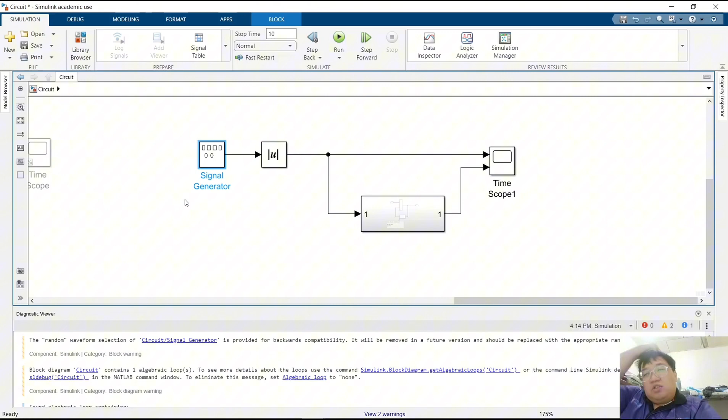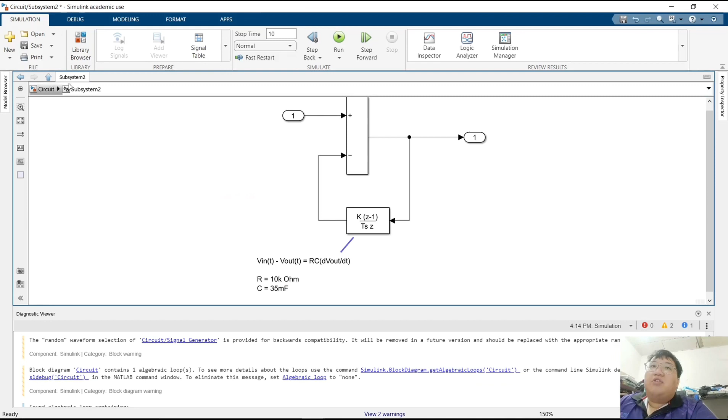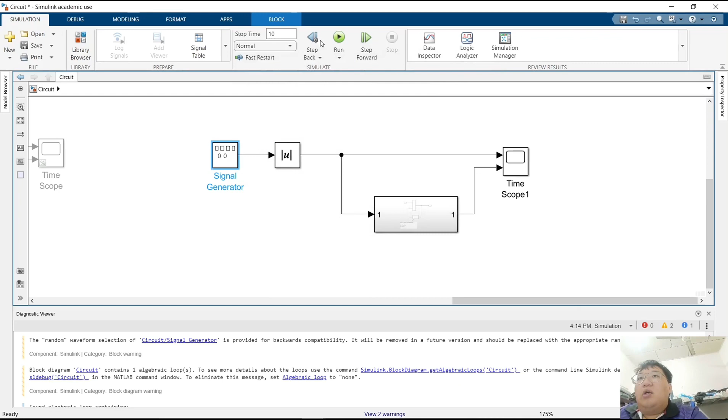Okay, so in addition, before we start the simulation with the values from the workspace, let's start with the generator first to test the RC filter system. So we set the signal generator amplitude and frequency randomly. For the frequency we can set 900k, because our group is using 900k. Now let's try to run it. The left one is before the filter, the right one is the waveform filtered with the RC circuit.

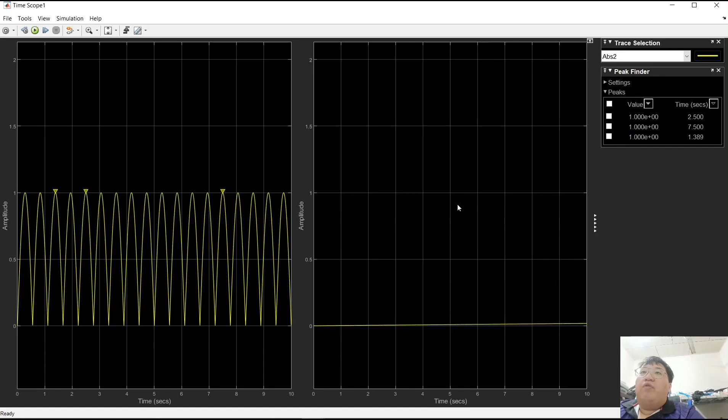Hi guys, I'm Valentine Teo Jin Lung, my matric number is C210010 and I'm from group 9. Today I'll present the simulation of x(t) to Simulink, and then X(omega) to Simulink. So let's start with x(t) first.

As you can see, this is our coding. Our group 9 is using a fundamental frequency of 150k, and the cutoff frequency is around 900 kilohertz. So let's try to run this coding first. Let's wait for a while. You can see that this is the waveform before the filter and this is after the filter.

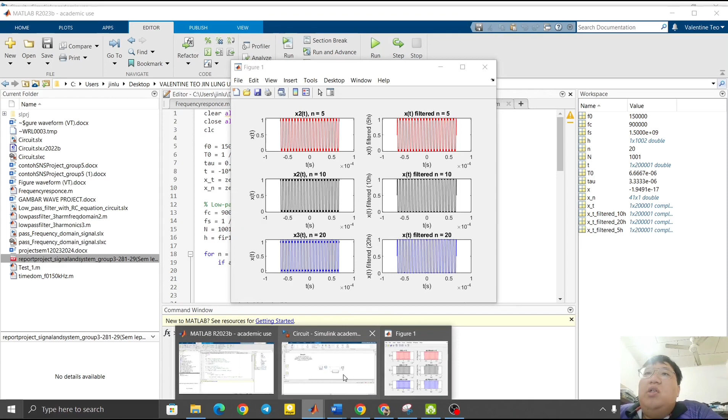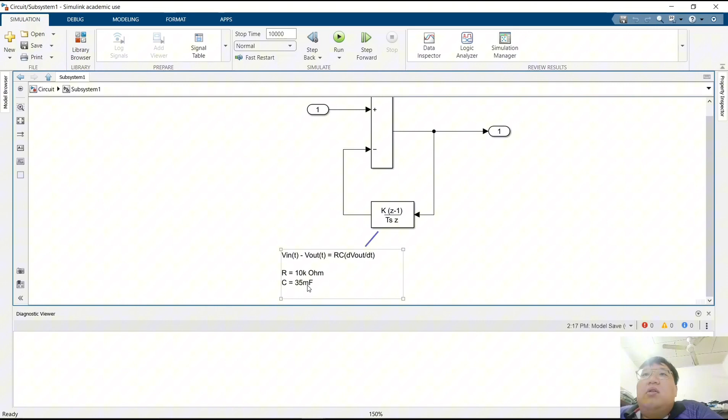Now once we got the values in the workspace, we'll move to Simulink. Before we run it, I would like to show you that this is our RC circuit that filters the signal. The R value is set at 10k ohm and the capacitor value is set at 35 millifarad. Okay, let's move back to it.

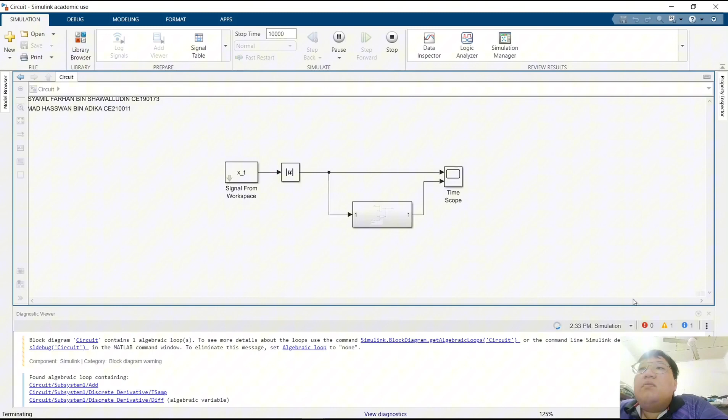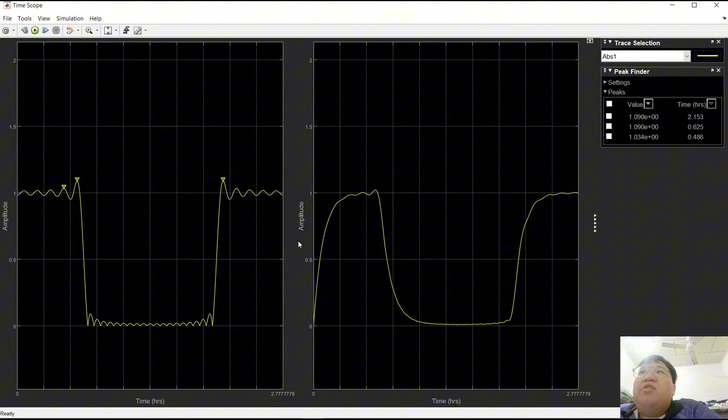So we set the stop time at 10,000. Now let's try to run it. It takes a while, still loading. Okay, so this is our waveform. This is before the filter and this is after the filter. Now we'll move to the next part.

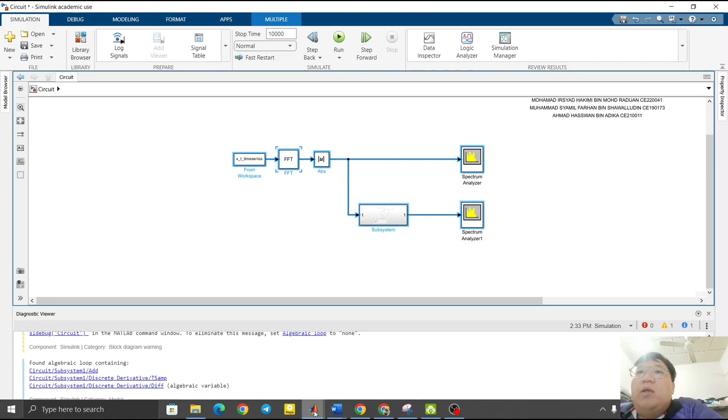Let's comment out this circuit first, because I have another circuit here, which is X omega. Comment. Now let's move back to MATLAB. So this is our circuit for the X omega. The fundamental frequency still remains the same, and then let's try to run the section.

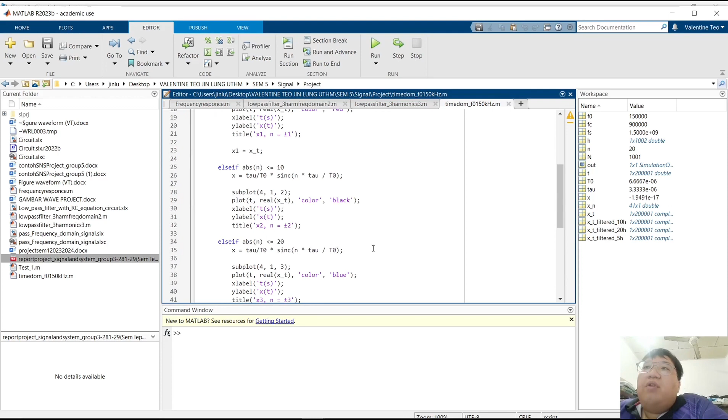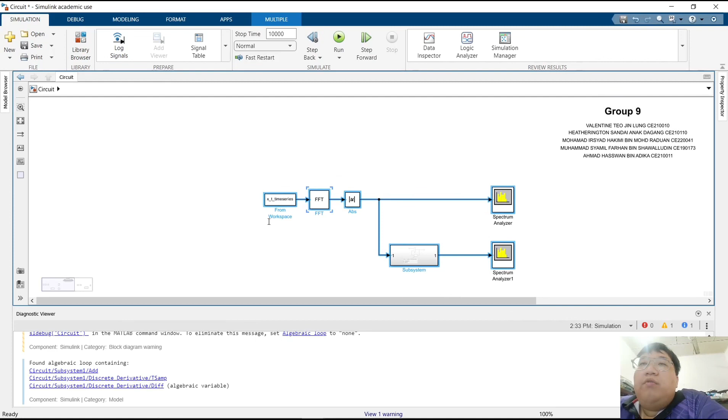It takes a while to run. After it's done, the workspace has been refreshed, and this is the figure of the x(t). So now let's move back to Simulink. It will retake the values from MATLAB. Now let's try to run it.

Okay, you can see that. So this is the waveform without the RC filter, and this is the waveform with RC filter.

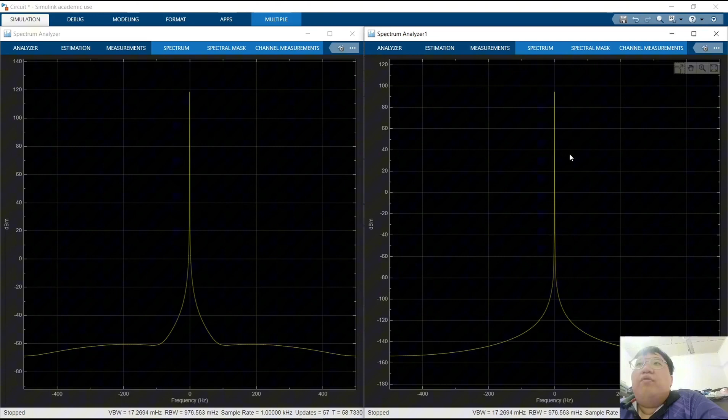So next, I'm going to explain the coding for our subject. This is our coding for the low pass filter. In this project we're going to design about three harmonics and get the output result. For the coding, the value given to us is 150 kilohertz for F0, and for the FC we were given 900 kilohertz. So this is the coding for the low pass filter three harmonics.

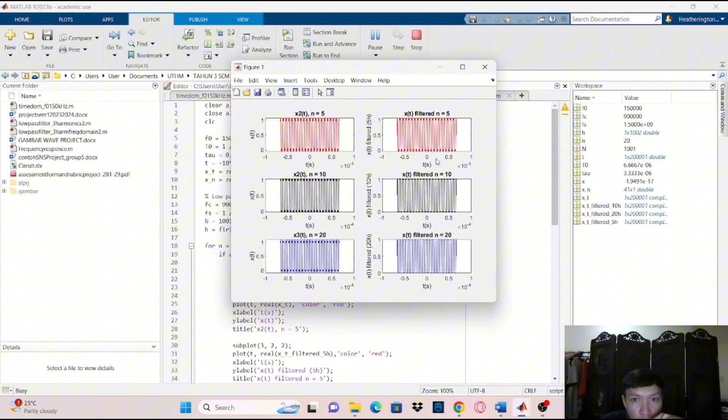As you can see, this is the filter signal with 5 harmonics. The second one is the filter signal with 10 harmonics. The last one is for 20 harmonics. So I'm going to run it. Yeah. So this is the frequency that we get for the x(t). As you can see, this is without the filter, and the other one is with filter. This is our x(t).

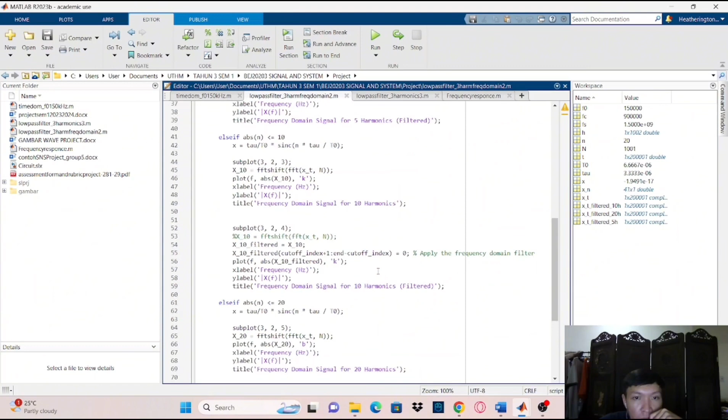Next, the coding for the frequency domain. For the frequency domain, we use the same values, 150 kilohertz and 900 kilohertz, with the third harmonic coding. So I'm going to run it. So this is the result that I get. For the frequency domain, this is the wave that we get, and the other one is for the filtered one. This is the result that we get.

And then for the tau part, we were assigned to use 10, 20, 30, 70 and 80 percent values. So this one we're going to get 10% tau. As you can see, this is the result that we get. And then for the next one, I'm going to change it to 20%. So I'm going to run it. So this is the result that I get, as you can see here.

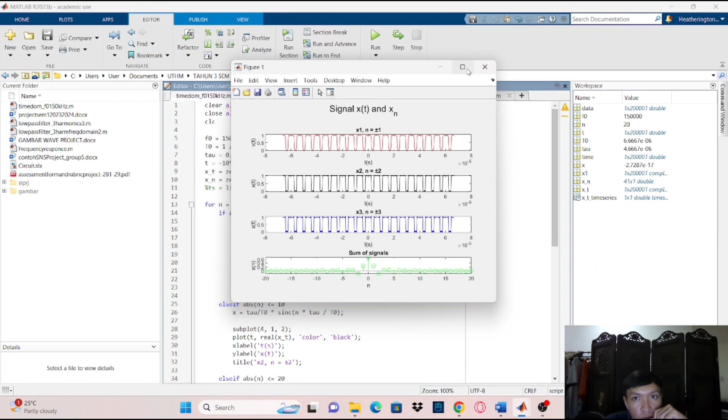And then the next one is 30%. So this is the sum of signal that we get for the 30% tau. And then the next one is 70%. So this is the result that we get for the 70% tau. And then the last one is 80%. So this is the last result, for the 80% tau.

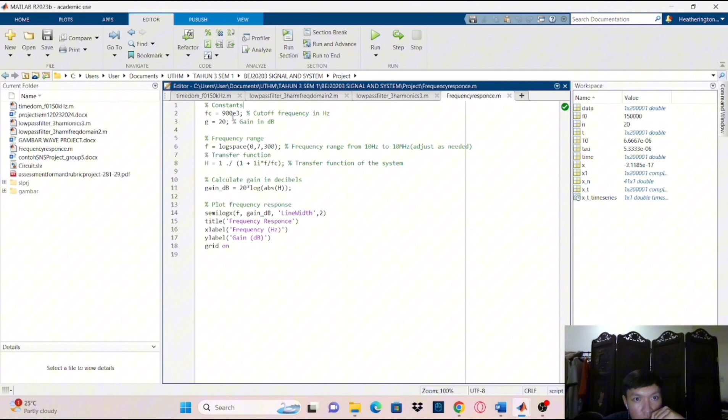Then the last one is our frequency response. We were given 900 kilohertz. So I'm going to run it. This is the formula that we were given, 20 multiplied with log. So this is the frequency graph, the gain versus frequency. As you can see here, the frequency response is going down.

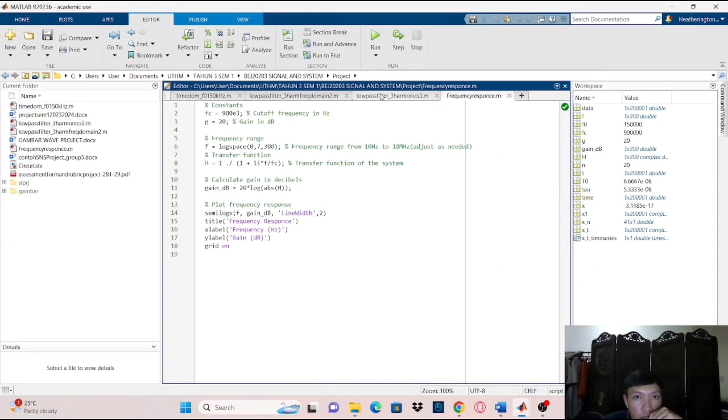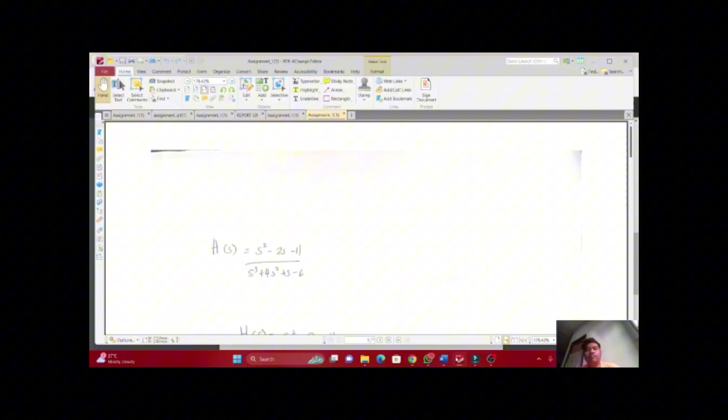I will explain question 1B, the manual calculation. For 1B, we need to find the impulse response h(t) based on the given roots, which are 1, -2, and -3. Okay, this is the manual calculation. First, we need to replace s cubed plus 4s squared plus s minus 6 with the given roots, and then we split it equal to A over s minus 1, because the given root is positive 1, plus B over s plus 2, plus C over s plus 3.

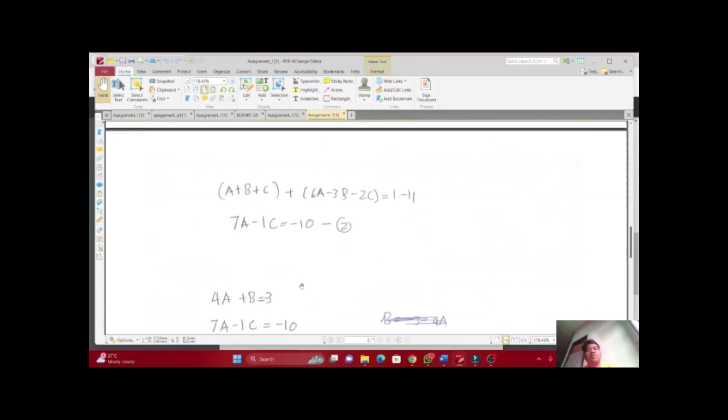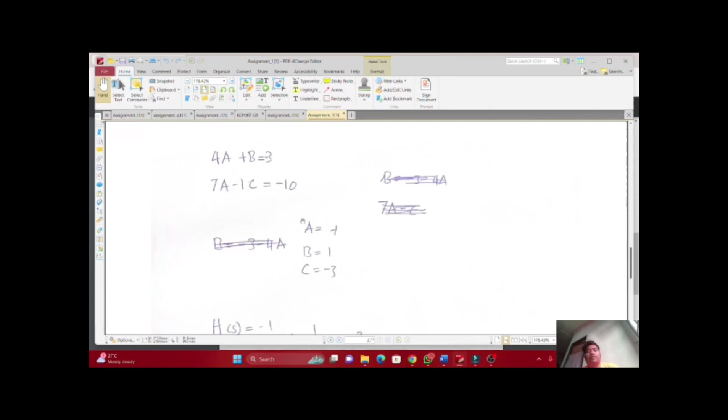From equations 1 and 2, we substitute to get the values of A, B, and C. For A we get negative 1, B is 1, and C equals negative 3. And then this is H(s). We replace A with negative 1, B with 1, and C with negative 3 in this equation. After that, we look at the Laplace transform table to get the impulse response h(t).

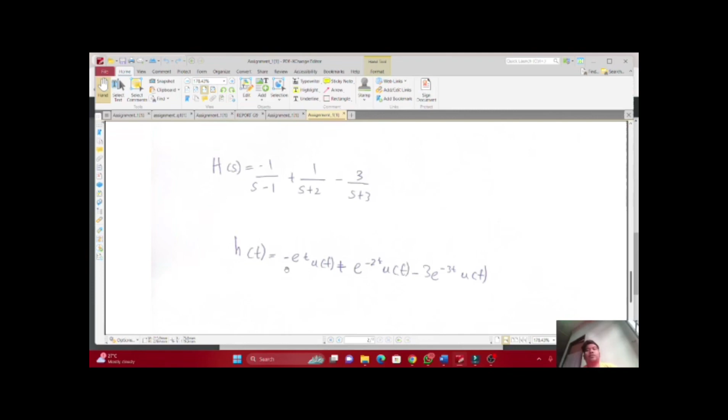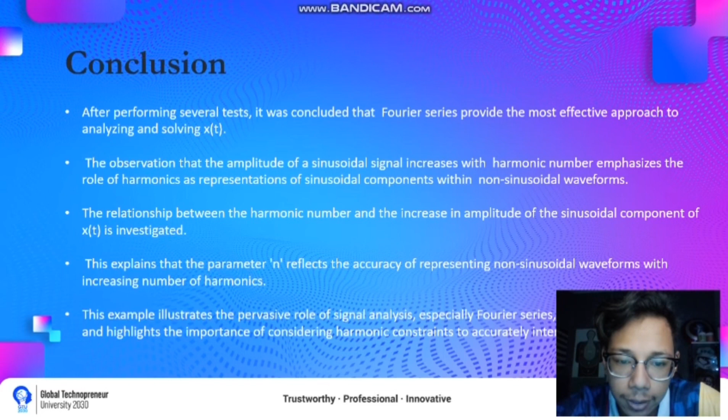Okay, for the conclusion, after several tests, it was concluded that the Fourier series provides the most effective approach to analyzing and solving x(t). We observed that the amplitude of the signal increases with harmonic number, emphasizing the role of harmonics as a representation of sinusoidal components within a non-sinusoidal waveform. The relationship explains the parameter n and reflects the accuracy of the non-sinusoidal waveform. So this shows us the significant role of signal analysis, especially the Fourier series.